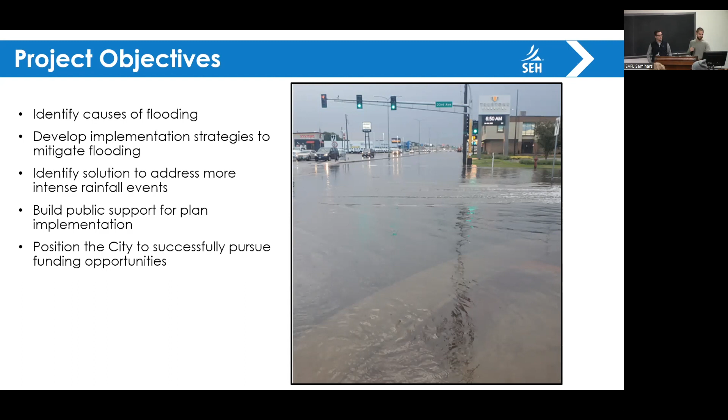Our process was first, before even the grant was approved or applied for, the city developed an inventory of stormwater flooding issues. Whenever we'd get a call, city staff would put this into our GIS database. When we saw the opportunity for this application, we analyzed that database and noticed there was a cluster of flood events within the Pantown neighborhood, primarily in the location of Veterans Drive and at the intersection of 7th and 25th. Concluding that that should be our primary flood mitigation area within the city, we moved on to developing a work plan and applying for the grant.

With it being approved, we moved on to our first round of public engagement. That included issuing 2,500 postcard mailings to all of the individual homeowners within the Watershed District, asking for any stormwater concerns they have for their neighborhood. What resulted from that is we identified another high priority flood site at the intersection of 27th Avenue and 1st Street. From there, we worked with SEH to develop the model inputs that included as-built, GIS, and survey information obtained by the city, and then moved on to the model development, as Trent will touch on shortly.

Throughout the process, we engaged the public several times, including the postcard mailings that I already talked about, and also visiting on site at the location where flooding was occurring. I think that was valuable just to get an idea of what their experiences of the flood events were, including estimated depths. And in one case, they even passed along recordings of the flooding, which helped us calibrate the model.

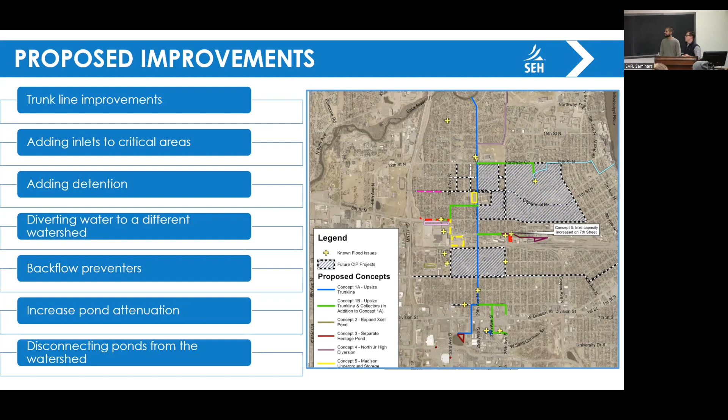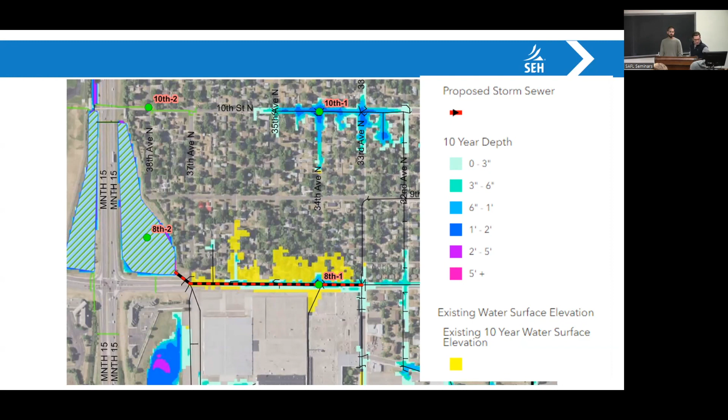Just to give you a frame of reference, I lost my photo, but there's another one back here. A little hard to see, but the background photo shows what that street looks like during one of our historic events. The street is completely underwater and extends quite a ways beyond the picture.

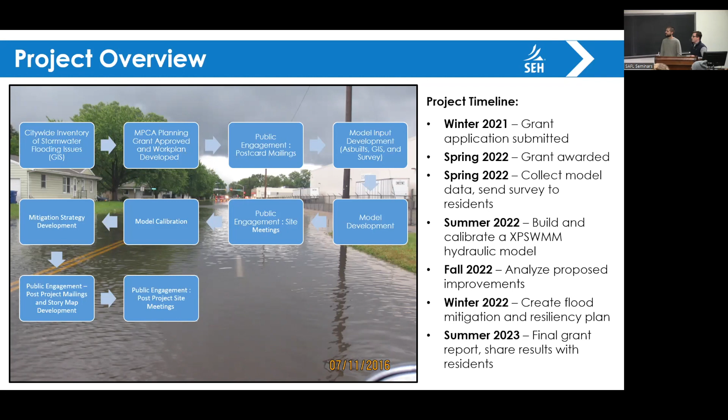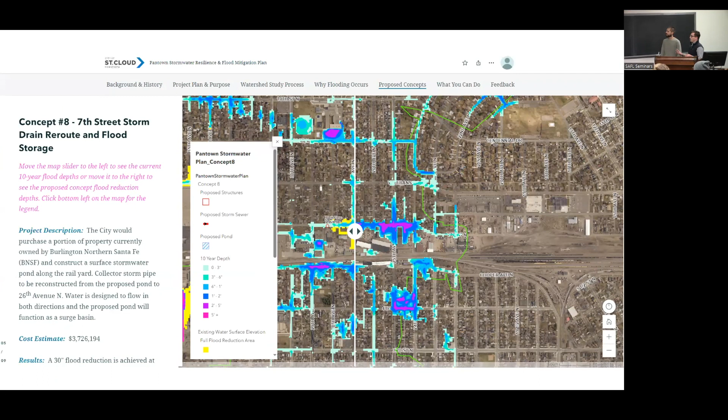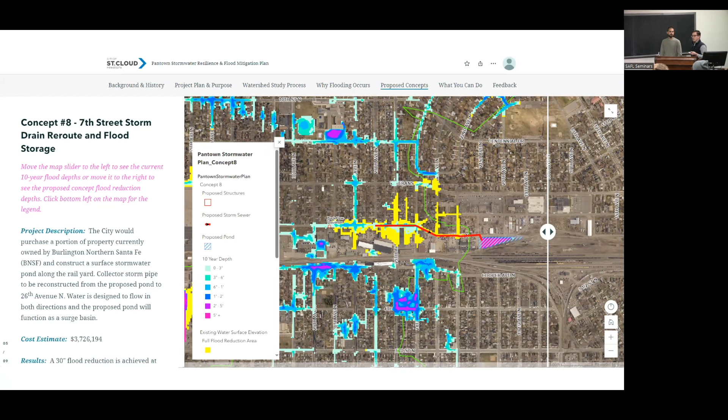Here we've got another proposed concept result map. I wanted to highlight this because I really like how the city shared their results. They set up a GIS story map that residents, or anyone, can access online. What I like is this slider - as you drag it across the screen, you can see it go from existing to proposed. The yellow is the existing, and you see the surface BMP that was implemented there. I think it's really important to make results easily digestible for everybody.

We ended up with a ton of concepts, so prioritization became very important. With a lot of back and forth between SEH and the city, and collaboration, we developed this scoring system to prioritize which projects to go after first - which ones give us the most bang for our buck, because St. Cloud, like every city, has finite money, and they need to know how to spend it best to get the best results.

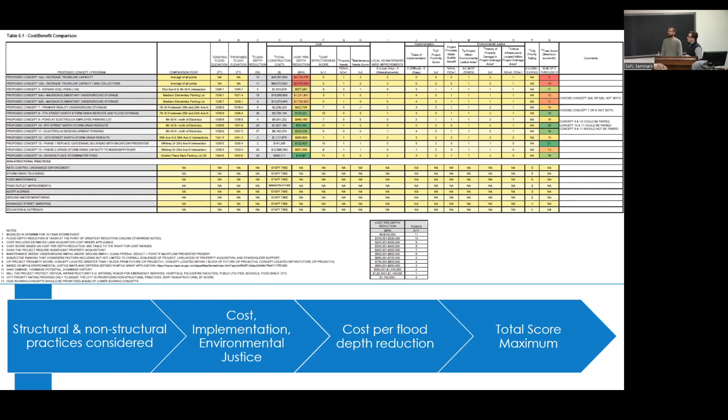I'll be zooming in on this. First off, we had to come up with a cost benefit analysis for each one, so we had to come up with a very high level cost estimate for each, and ended up with a cost effectiveness score.

Property needs is pretty self-explanatory. Maintenance needs - if it was something low maintenance, like just upsizing some storm sewer, that got a higher number; if it's high maintenance, it got a lower number. Local versus watershed-wide improvements is another pretty self-explanatory one. Things like the trunk line replacement for the entire watershed got a high number there, but it got low marks on cost effectiveness and the next category, ease of implementation.

The CIP proximity score - if we knew the project was near a planned CIP project, it got a couple points because it'd be a lot easier to implement near another project and pair it, versus a standalone stormwater project. Water quality got a point, and then whether the project was within an environmental justice area - if it was within 2 of those areas, it got 2 points, or 1 point. And then history of property damage.

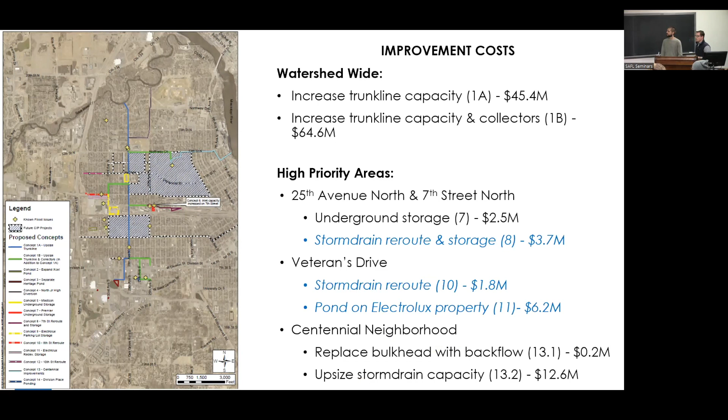Here are just some of the costs. As I mentioned, the trunk line reconstruct projects had an astronomical price tag associated with them, but moving into some of the more local projects in our high priority areas becomes much more manageable, especially if we can combine with another project.

As I alluded to earlier, the next steps in our process are to continue communication with property owners and other members of the community who have an interest in stormwater, and then to research funding opportunities. As Grant noted, several of these solutions have quite a high price tag, and coming up with a funding solution is going to be a big part of implementing these.

We also are looking for project partners. In some cases, not all the solutions but some of them, this might end up being a private-public partnership. In that vein, near the area of Veterans Drive, where we were seeing quite a bit of flooding, a fairly large property sold recently, so we've been reaching out to them to coordinate if there's any stormwater BMP we can help place on that site.

Yes, lastly, we're just prioritizing the upcoming projects. So if we have a CIP project that happens to also be near one of the implementation areas, that might give it a boost in how we rank that within the city projects.

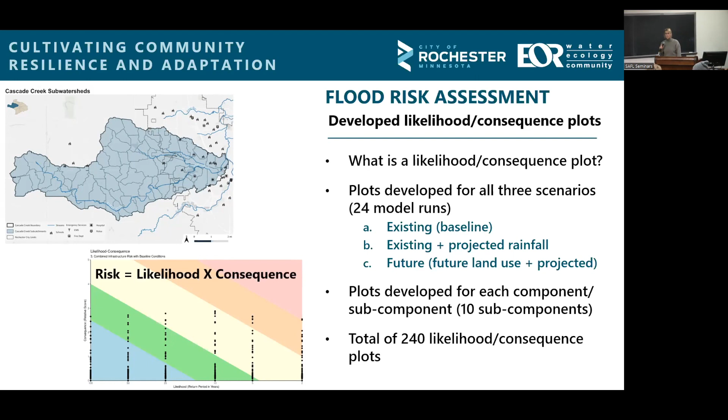So then what we did is we could evaluate each of the subcomponents individually to see which subcatchments are coming up higher in terms of risk, but then you can aggregate them to show the individual sustainability components. For example, if the one on the right is infrastructure, we had the individual ones, length of road, critical facilities, individually, so we aggregated them by sustainability component. And in the end, you could aggregate it also by all 3 sustainability components to just have 1 score.

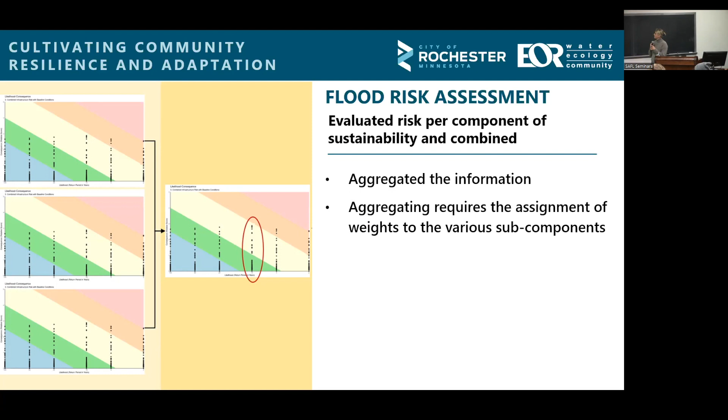And then from there, you can plot each of these likelihood consequence plots to show visually which subcatchments are coming up as the highest priority subcatchments. And then the city can use that information to say, does that ring true? Is that where we have seen flooding for, in this case, a 10-year event?

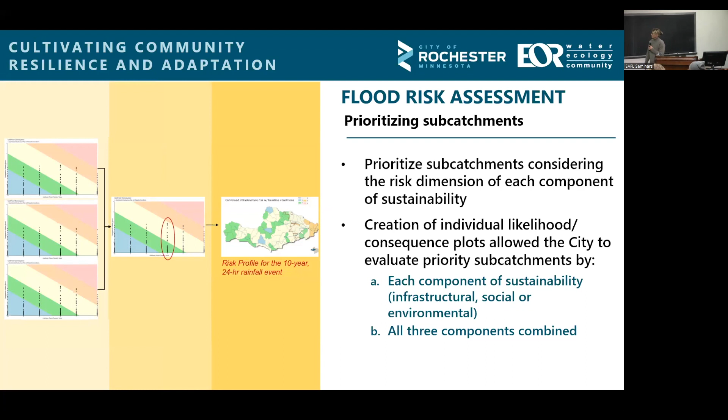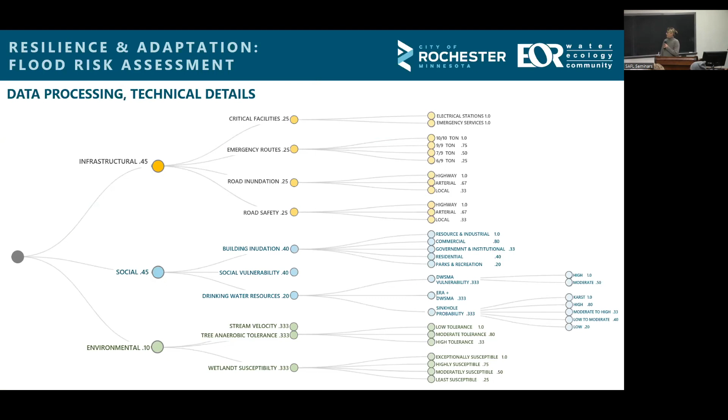So the city could use that tool to say, okay, where are we starting to see multiple impacts affecting the same subwatershed, so they could identify those as the priority subwatersheds for the implementation of projects.

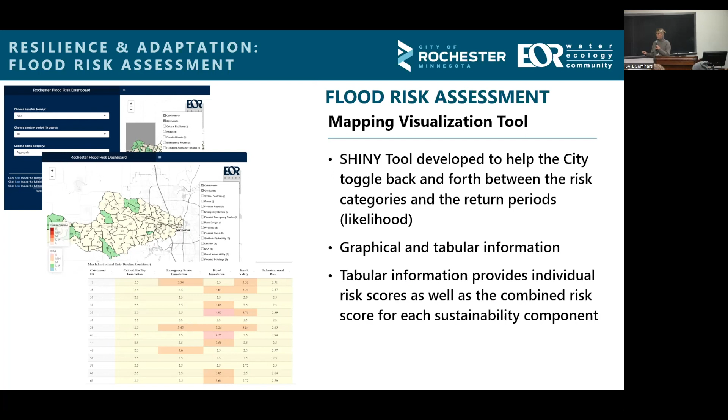Okay, thank you, Camilla. Yeah, and I'd just like to add that the risk assessment was incredibly important because it provided a sustainable way of identifying priorities for projects that ultimately will come into play, taking into account things like social justice and whatnot.

So, resilience hub. That fits in with the flood risk assessment because that provided the boundary conditions, where are flooding concerns present, and where are potential problems that we can fix through projects. But again, what is a resilience hub?

When I first entered this, I had that question, but resilience hubs are community serving facilities augmented to support residents, coordinate communication, distribute resources, and reduce carbon pollution while enhancing quality of life. Resilience hubs can meet a myriad of physical and social goals by utilizing a trusted physical space, such as a community center, recreation facility, or multifamily housing building, as well as surrounding infrastructure such as a vacant lot, community park, or local business. So really, a resilience hub is a resource center, intended to be a staple of the community, something people can relate to and understand is there to help you.

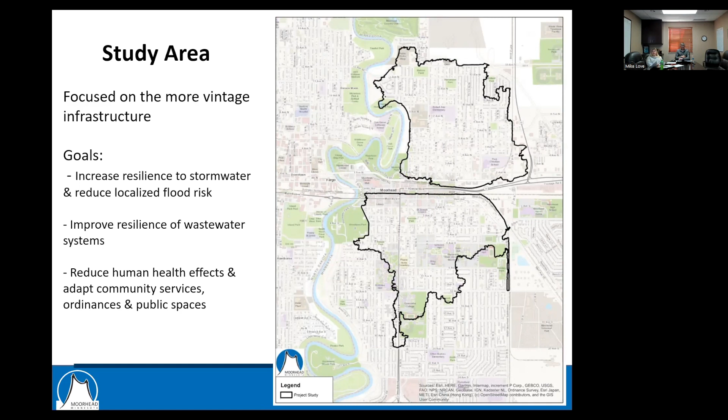In order to engage the public, we set up a work task timeline. We wanted to collect new data for our modeling and update our model, then held a public meeting in the fall to engage the public. We sent out postcards to about 3,000 properties, and about 8 citizens showed up for our first public meeting. We also had other options available. After data collection and the first public meeting, we drafted a risk assessment report and took that back for an additional public meeting. At the end of June, we submitted our final risk assessment report for our areas.

Our outreach that we performed were postcards. We sent out 3,000 postcards with a QR code, and we had different languages to accommodate the non-English speaking residents and citizens. We also made available an online survey, and we sent postcards out for both public meetings. So approximately 6,000 postcards were sent out as part of this project.

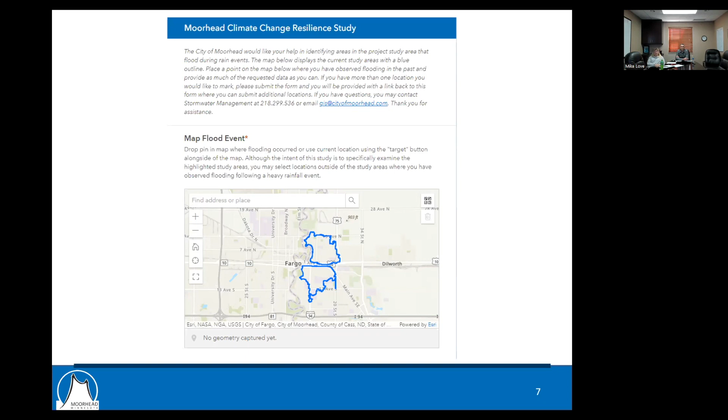So this was the responses we got back from that online survey, or the online interactive GIS. You can see where the dots are, those are within our north and south study areas. We had 8 reports, with an average flood depth of 7.8 inches. A lot of the flooding could have been due to plugged inlets. That's one thing we see around here, and we try to advocate for residents and citizens to adopt a catch basin to help keep our catch basins clean, so when we have a heavy rainfall event, we can hopefully help prevent additional rise in the street.

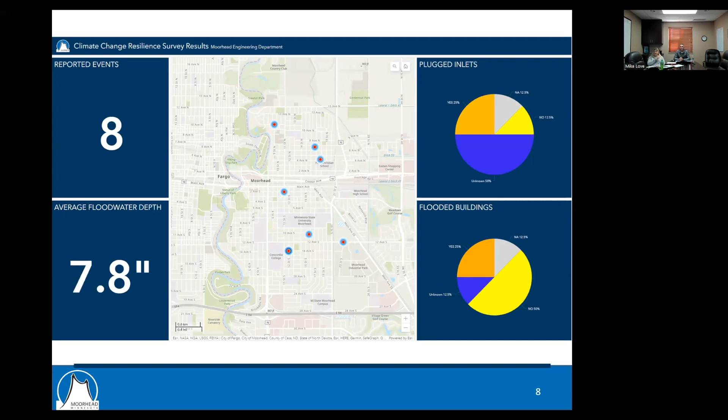So this is when our design events were, when the city first designed the infrastructure in the north and south areas. It was based on the TP40 rainfall data. Our current infrastructure in the newer areas was designed based on the Atlas 14 data. Both of these data sources are based on past history, so now we need to look into the future and use the data to better prepare for climate change. After considering several climate change projection sources, we selected the EPA National Stormwater Calculator, which projected a 15.8% increase in rainfall depth.

We focused the study on the higher probability storm events, shown in red. And then I'm going to turn it over to Mike Love.

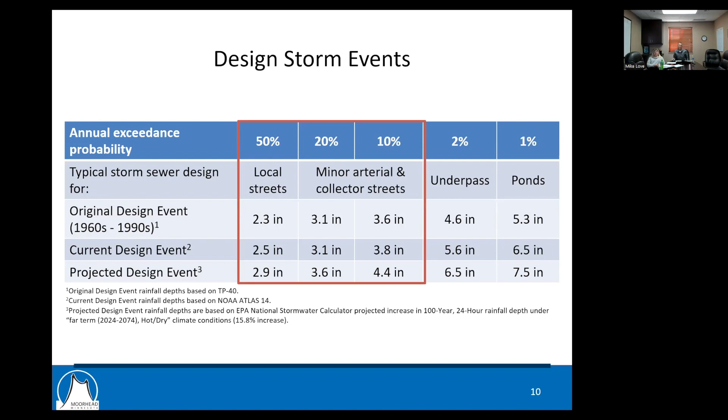Okay, thanks Andrea. Again, I'm Mike Love with Houston Engineering. I'm going to step through our impact assessment and risk assessment procedure. I know we're getting a little short on time, so I'll try to be a little quicker.

Using, like Andrea mentioned, we were fortunate that the city had invested in a comprehensive InfoSWMM model for the entire city, so we were able to start a little bit ahead of most people because we had that model available and didn't have to create it. We did do some updates to it, and for calibration, the model had previously been calibrated, but we more used the public input as a validation step to make sure that what the residents were seeing was what the model was showing.

So the impact assessment framework focused on 4 major categories: structure impacts, sanitary sewer impacts, transportation impacts, and community spaces impacts. Each of those categories was assigned a score based on the inundation observed in each model catchment, and that score was then weighted based on the type of impact. So for instance, if it was a structure impact, it received a higher 40% weighting, whereas if it was more green space or a playground facility, it'd receive a lower weighting at 10%.

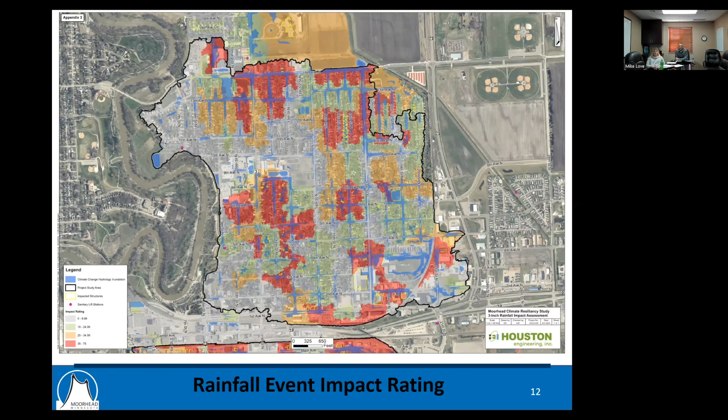Each catchment was assigned a composite impact rating that was then mapped with a color gradient, shown on the screen here. Like Andrea mentioned, there were 2 study areas. Just for simplicity, I'm going to focus on this north area for demonstration purposes. The color gradient made it pretty easy to see where our highest impact areas were within the city and the study area.

So we did this impact assessment for 3 different rain events, and these correlate with those higher probability events that Andrea had mentioned. We looked at a projected 2-inch, 3-inch, and 4-inch rain event, and then mapped the inundation and the impact rating for each of those events.

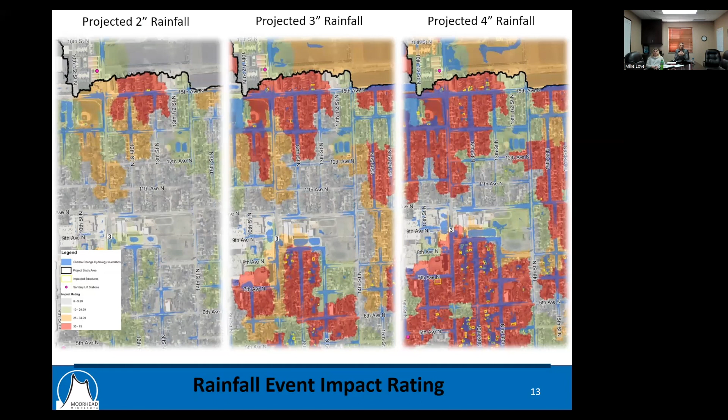As you can see from left to right, as the rainfall increases, the inundation, shown in blue, increases, and then the risk rating goes up. So when I say projected 2, 3, and 4-inch, that means the future equivalent of a 2-inch rain today, assuming the climate change projections hold true.

So at that point, we had our impacts figured out. Similar to Rochester, to get the risk, you need to factor in the probability of the event. So we took the probability of occurrence of the 2, 3, and 4-inch, multiplied it by the impact rating, and came up with a risk rating.

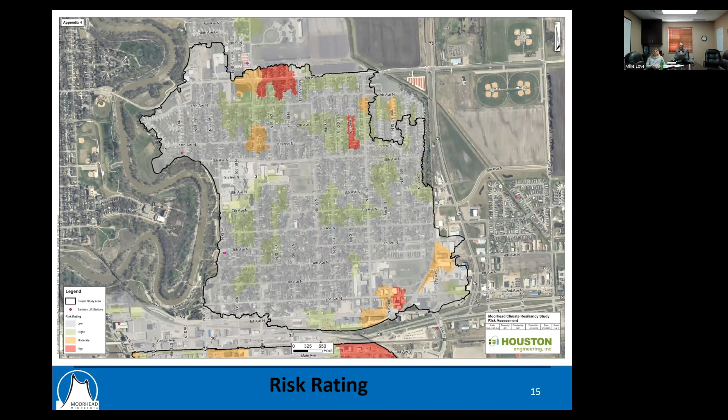We then mapped the risk rating with a low to high gradient on it, so we could pretty easily see where the high risk areas were within the study area.

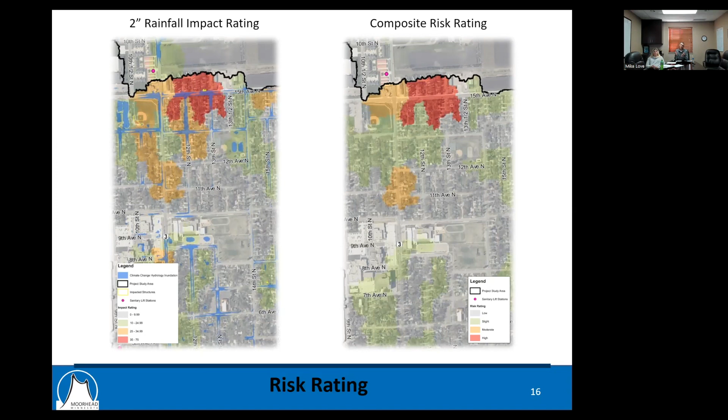Because the 2-inch rain was such a high probability, about 92% probable, in most areas that event is what drove the risk. Not all areas though. We compiled the risk of the impact times probability of all 3 events. Whichever one produced the highest rating in that catchment was what was mapped.

Using the risk assessment mapping, we then took it a step further and developed an improvement plan to try to mitigate some of the risks to those high risk and moderate risk areas.

This is a zoomed in view of one of the areas. If you look at the north, the top of the screen, we're proposing a stormwater pond, trunk line storm sewer infrastructure improvements, and we have an underground retention facility in an area.

Really the tricky part here is in Moorhead, since this is an established neighborhood with not a lot of open space, the opportunities for stormwater ponds is very limited. So the proposed improvements mainly consist of just putting larger storm sewer in to handle the increased rainfall.

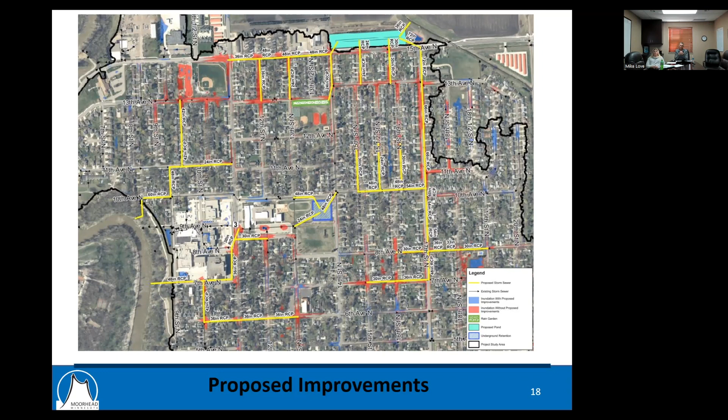On this map, you can see the areas shaded in red. Those are areas that would flood during a future event, but if we installed the improvements, they would no longer flood.

Once we developed the proposed improvements, we went through the whole process again. We reanalyzed the 2, 3, and 4-inch events, remapped the surface inundation, recalculated the impact rating for each catchment, recalculated the risk rating for each catchment, and remapped that so we could see the improvements that the infrastructure improvements would create.

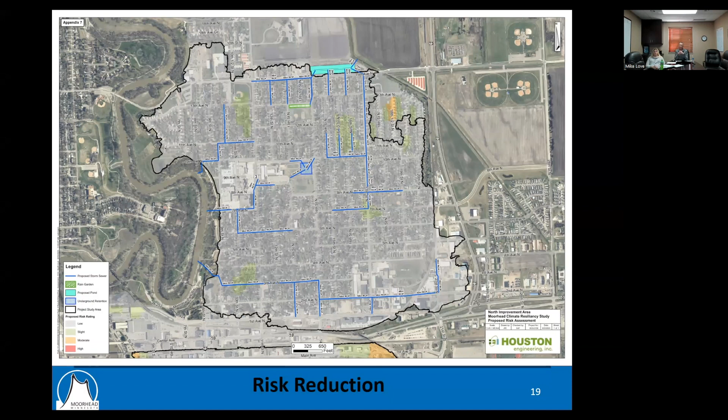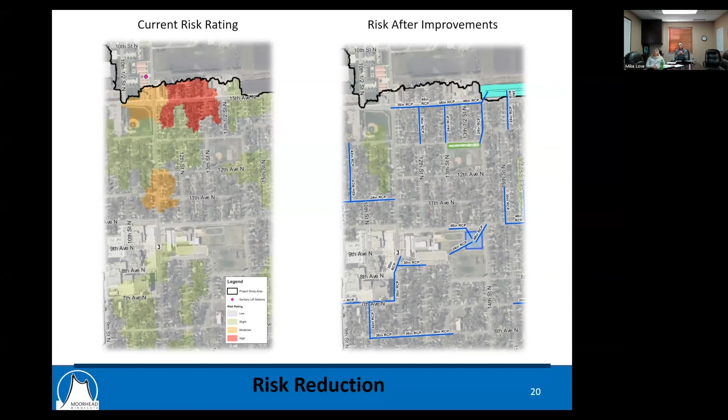So next steps: the city is working to develop a phased improvement plan to implement these in conjunction with their capital improvement projects. The improvements needed are pretty expensive—we have them estimated at about 120 million for both the north and south improvement areas. So funding opportunities are key. The city's really looking for any help they can get from the state. Once they secure some funding, we'll look to develop plans and specs and implement the improvements. With that, we'll take any questions.